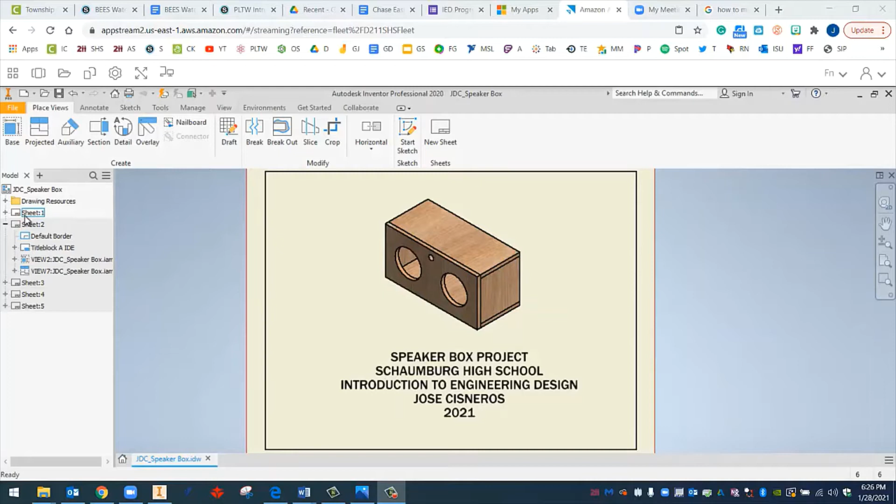Cisneros. In our previous video, we started our working drawing for our speaker box project. If we look at sheet 1, we can see we have a cover page. Sheet 2, we took the different views of our speaker box and laid them out with these orthographic projections. So we have our front, top, bottom, right side, and left side.

In our third sheet, we have not started. This is where we're going to lay out those individual pieces. So our front panel, our top and bottom, our right side, left side, and our back. So that means we need 1, 2, 3, 4 sheets to do so. So actually it looks like we need to add one more.

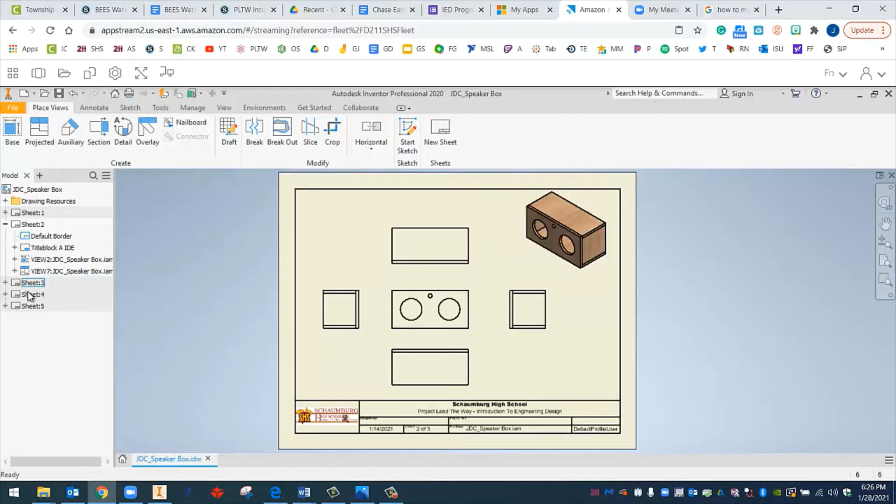The way you add a sheet is by clicking on New Sheet. So I'm going to click on that and I'm going to click OK. So you can see the 6th sheet is added on. Remember, when this is white and not grayed out like this, that means that this is the sheet that you're in. If I double click sheet 5, you can see sheet 5 turns white. That means I'm inside of sheet 5.

If I double click here, sheet 3, this is the one that I really want to be on to start my multi-view drawings. Remember, multi-view drawings are orthographic projections of a 3D object. So for the first one, we're going to bring in our front panel. So I'm going to click on base over here, and I'm going to search for my front part. So right here, there's my front. I'm going to click OK.

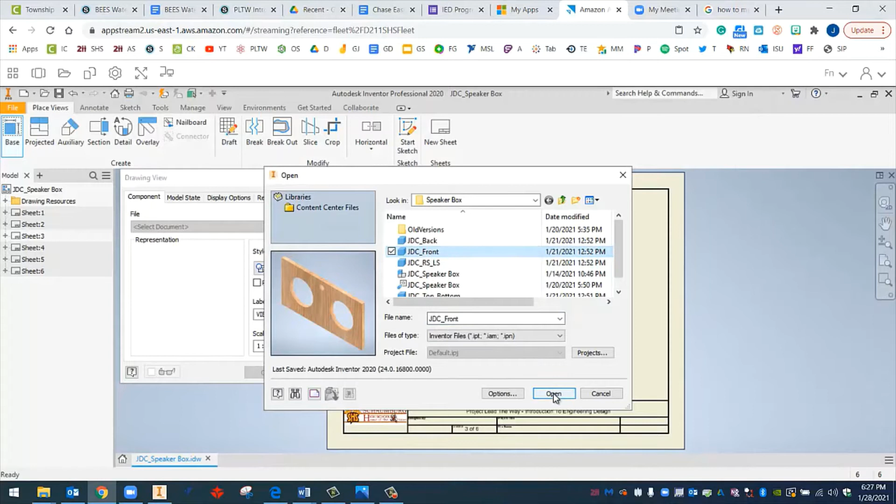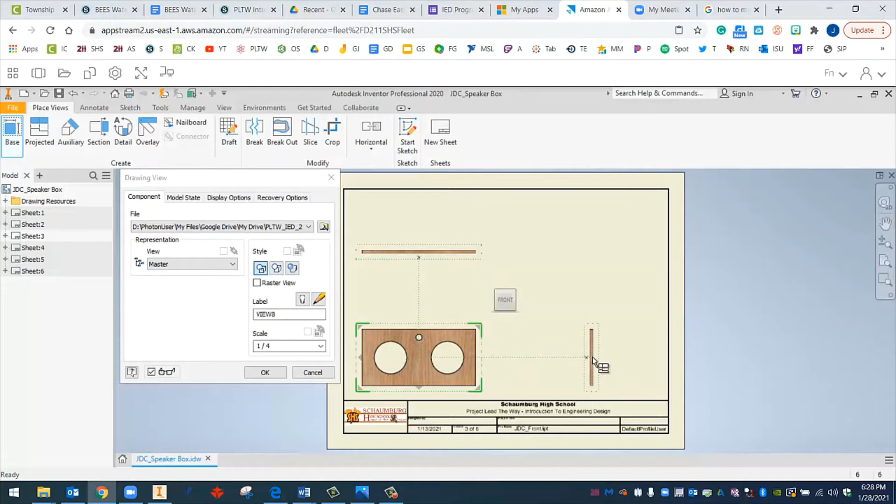And now you can see that my front view of my front panel is shown on the screen. I'm going to click and drag and place it down at the bottom left. I'm going to move my mouse up, click, move my mouse to the right, click, and then move my mouse to the top right corner and click one more time. What we have here is our front view, our top view, and our right side view. This right here is an isometric view of the 3D object, which is, again, the front panel.

Notice over here in this window, this is our scale. If we wanted to make this smaller or bigger, we would have to change the scale. Right now it's set to a 1/4 scale. Over here we have a couple of different options for the style. So if this one is highlighted blue, that means it's selected. So right here, hidden lines will be shown on all views. I don't think we have any hidden lines with any of these panels, so nothing really will show up.

This right here is if you wanted the hidden lines to be removed. Hidden lines are something that we can talk about in another video, but essentially it is anything that maybe is hidden from a particular view. So say if there was some kind of feature in the back of this panel that we could not view, hidden lines would be produced so that we can at least know that there's some kind of feature, some kind of geometry in the back that we just can't see. And it'll show as a hidden line, which is a dotted line. We can talk more about that in another video.

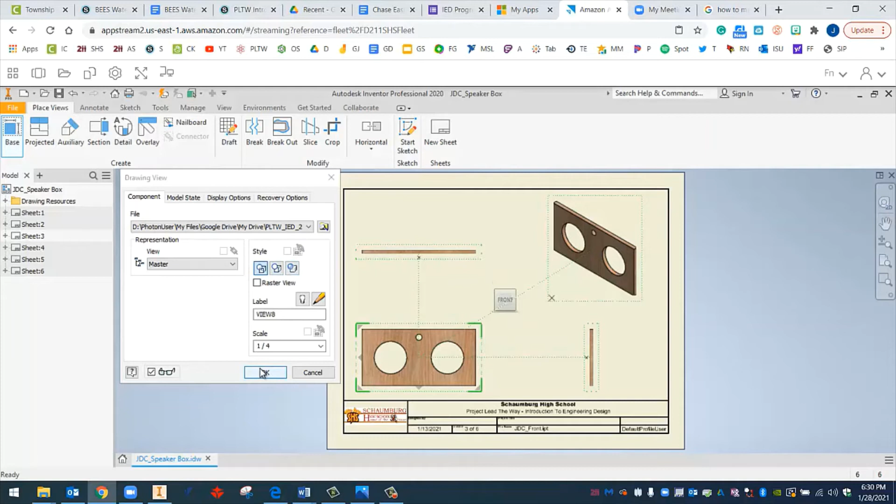Since it's not selected, if I go ahead and click OK, which I'm going to do right here, you can see the shading goes away. That's because it wasn't selected. What I typically do is I leave the front, top, and right side views black and white, not shaded. But then I go ahead and make my isometric view shaded. I think it just makes more sense. It makes it look a little bit cleaner.

So I'm going to go over here. I'm going to hover over my isometric view, and you can see that the red dotted lines show up. That's where I'm going to double click, and then over here I'm going to click on shaded. Now it doesn't change it automatically. In order for it to actually go into effect, you have to click OK. So now it's shaded. There's our multi-view drawing.

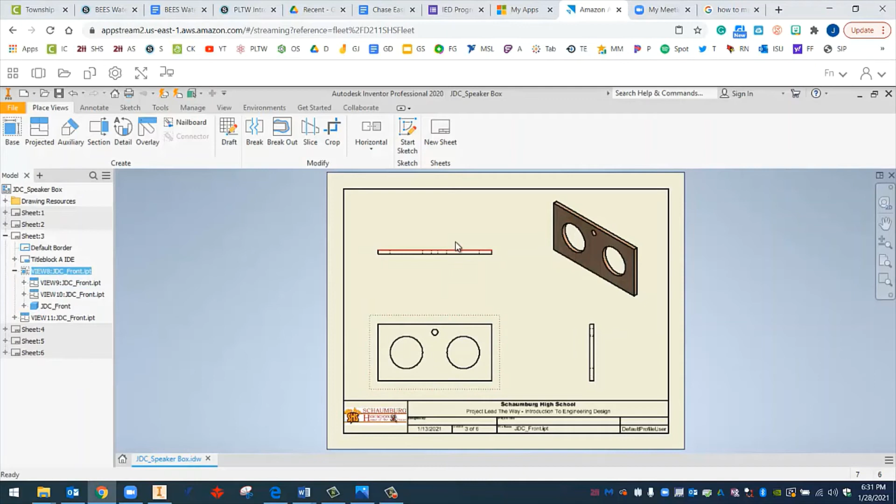One really interesting thing about this is if you click and drag your front view, your top and right side are linked to it, so it'll move along with it. Alright, so find a space like this where you think it's nice and organized. And now what we're going to do is the exact same thing with our sheet 4, 5, and 6, except we're going to bring in the top, bottom, the right side, left side, and we'll bring in the back.

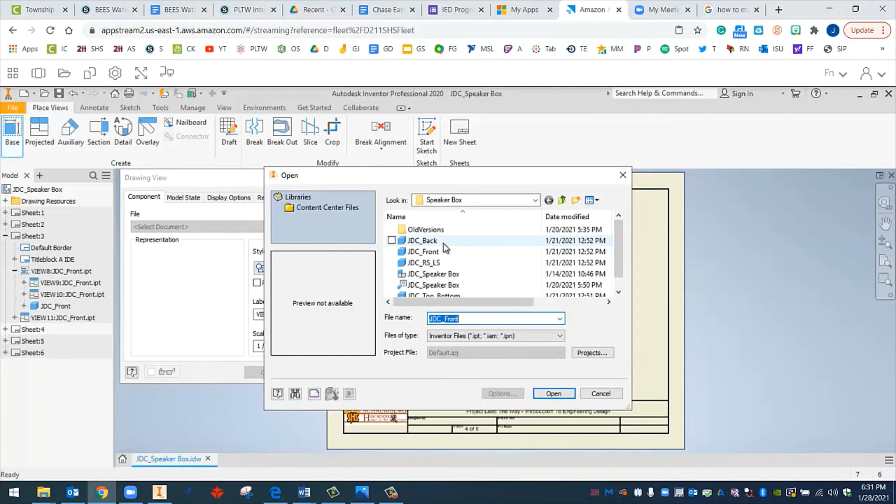So I'm going to double click sheet 4, and exact same thing. I'm going to go to base, search. I'm going to click on, let's do the back. I'm going to click open. You can see the front view of my back panel is the one that shows up. I'm going to click, move my mouse up, move my mouse to the right, click, move my mouse to the top right, click. I'm going to click OK. I'm going to double click my isometric view. I'm going to click on shaded, and I'm going to click OK.

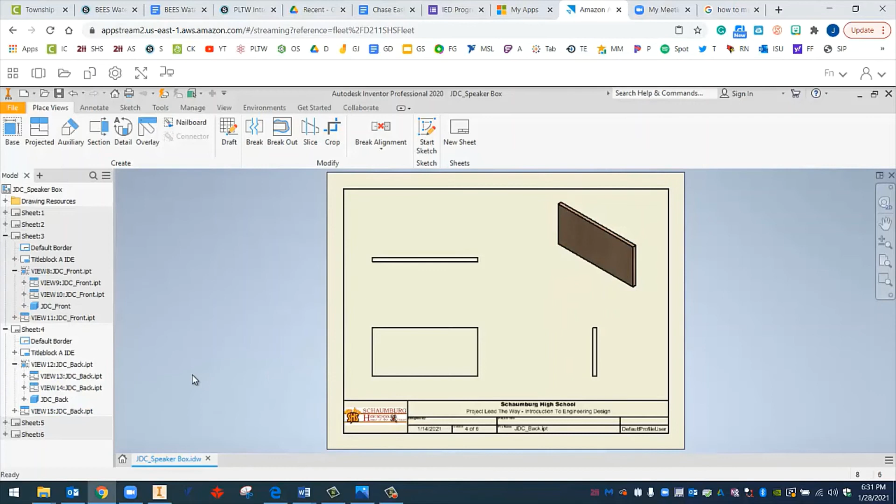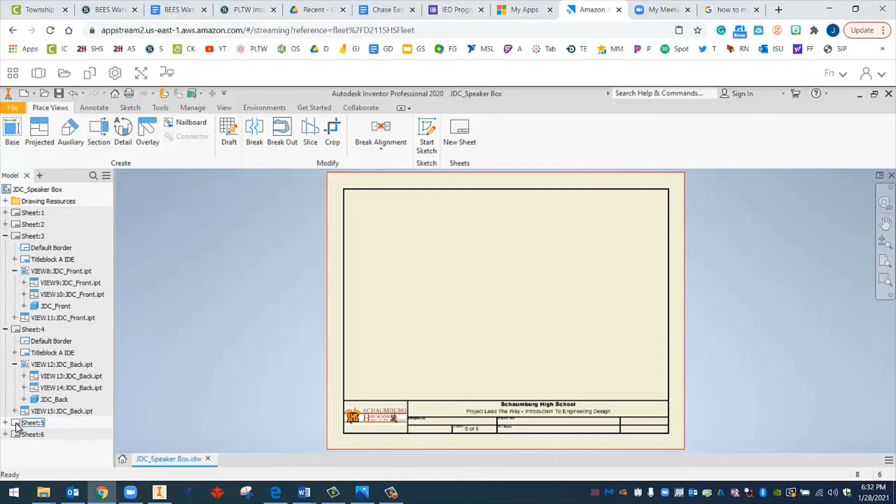Let's do that again, now with sheet 5. I'm going to double click, and you might experience, if you double click here, something might sometimes not happen. It's always nice to double click the actual little picture. That will guarantee that it gets opened. Sometimes if you double click the words, or maybe over here, sometimes it doesn't work, from what I've seen. So just a little tip, if you double click the little icon, the little picture, that'll always open it for you. So we're in sheet 5 now.

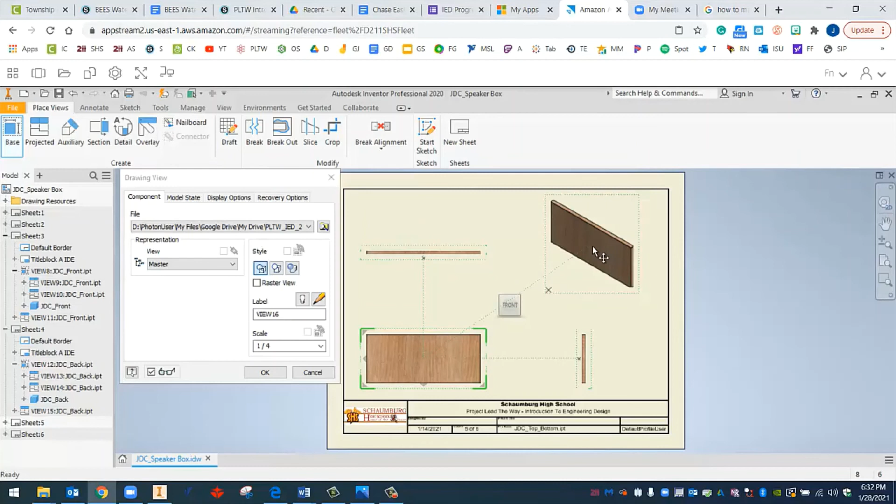I'm going to go to base, I'm going to go to search, and I'm going to bring in my top, bottom. Remember, the top and bottom are the exact same dimensions, so we group them together. I'm going to click open. There's my front view of my top, bottom panel. I'm going to put that in the bottom left corner. I'm going to move my mouse up, to the right, to the top right, and click OK. I'm going to double click my isometric view, and I'm going to click shaded, click OK.

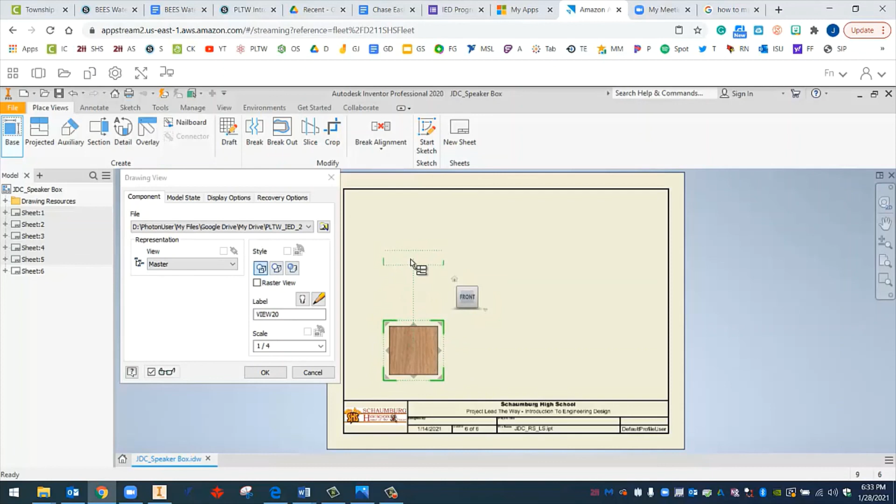Let's do that now with sheet 6. So sheet 6, I'm going to just minimize some of this stuff. Sheet 6, I'm going to double click. I'm going to go to base, search. I'm going to find my right side, left side, click open. Bring that to the bottom left corner. Move this up, move this to the right, top right, OK. Double click this, isometric view, and then go to shaded.

All right, now we've placed all of our multi-view drawings onto these separate sheets. In the next video, we'll talk about how to dimension these.